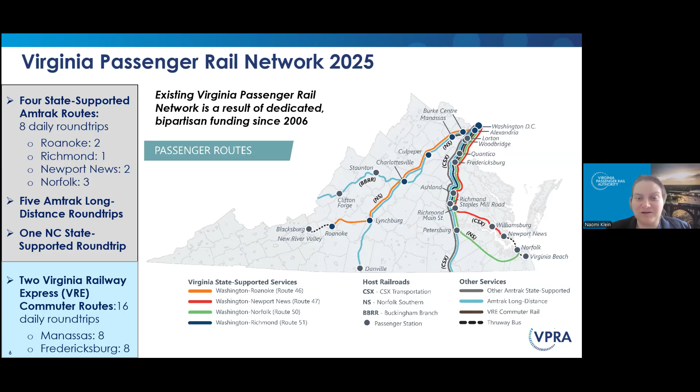So the benefit of the Transforming Rail in Virginia program - that landmark deal I was referring to with CSX is known as Transforming Rail in Virginia - allowed us to get the land and create this program of projects that will increase the tracks between DC and Richmond so that we can provide more and better service.

So increased capacity to accommodate more passenger rail service. That even includes VRE being able to run trains at night and on the weekends. Improve efficiency of passenger, commuter, and freight rail services, reducing bottlenecks and improving reliability - not just running more trains, but having existing trains be able to be on time more often.

This shows you our portfolio of projects between Washington D.C. and Richmond, Virginia. Today we're here talking about the Long Bridge project and the Alexandria 4th Track project. Those are the 2 projects that will impact residents in Alexandria and Arlington. But you can see we have a slate of projects being built, and when these projects are completed, that's what will unlock new rail service.

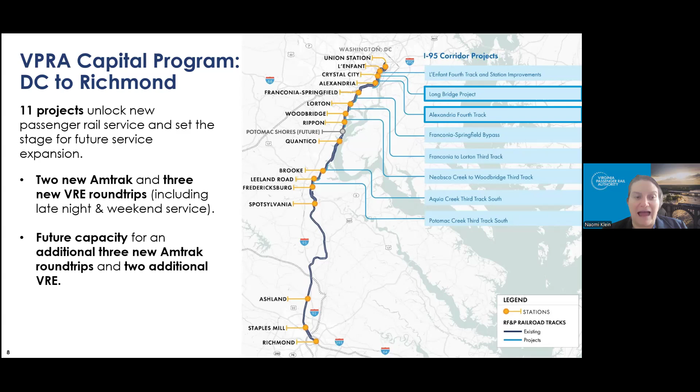As you can see in the text, we have 11 projects that unlock new passenger rail service and future capacity, as well as new service that's already planned. So I'm here today to talk about the Long Bridge project, then I'm going to hand it off to some of my colleagues to talk about other projects in the community.

So the Long Bridge project - you can see the project limits on this map, and we're going to get into some more detail on that. This is an existing 2-track bridge that crosses the Potomac River. It is not only a bottleneck for DC and Virginia, but for all of the East Coast. Even your orange juice coming from Florida typically has to go over this 2-track rail bridge.

Why it is such a bottleneck is because south of here you have 3 tracks, north of the bridge starting at Union Station going up the East Coast you have 4 tracks, but right at this point at the river you have only 2 tracks, and that has to serve CSX freight rail, VRE commuter rail, and Amtrak intercity passenger rail. So all 3 of those rail modes are sharing this 2-track bridge. When this project was first proposed years ago, the tracks were already operating at 98% capacity.

So the purpose of the project is that we will be constructing a new separate 2-track bridge, leaving the existing bridge in place to continue to be owned by CSX. So then you will have 4 tracks - 2 owned by VPRA, 2 continuing to be owned by CSX - which will double the rail capacity and allow us to run passenger trains separate from freight trains and remove this bottleneck. There's also a bunch of other bridges and infrastructure associated with what I just described, which we'll get into in a little more detail.

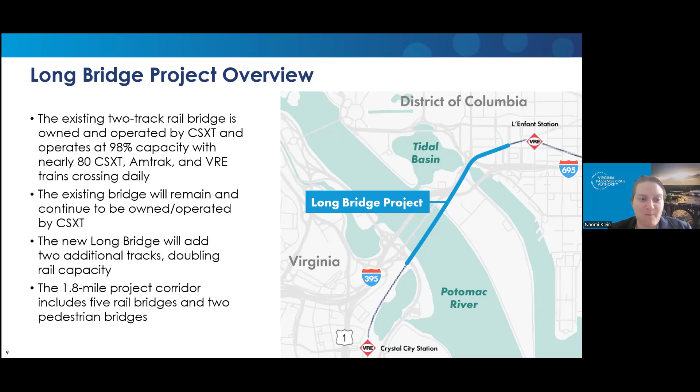Yes, so I talked a little bit about the 2-track bridge across the Potomac River, but this entire project is really 5 rail bridges and 2 pedestrian bridges. So while we call it the Long Bridge, it is much more than just a singular bridge. This shows you the project limits in a little more detail.

It begins in Arlington at what we call RO interlocking. Interlocking is just a railroad term for where various tracks all change over so that trains can move between them - it allows trains to move from one track over to other tracks and switch. So that's the term interlocking. It begins just south of the Long Bridge Aquatic Center. The project then builds the 2 tracks over and across the George Washington Memorial Parkway and Mount Vernon Trail, then over the Potomac River, and then in East Potomac Park, over Ohio Drive, then over I-395.

Once it crosses over the I-395 bridge, the amount of space we have to work in narrows so much that we cannot build a separate 2-track structure. So what we have to do on the other side of I-395 is actually take down the existing 2-track structure and rebuild a 4-track structure.

And that new 4-track structure will continue through East Potomac Park, over the Washington Channel, over Maine Avenue in Southwest Washington, D.C., through the Maryland Avenue overbuild, and then end where you're looking on the screen on the right side at LE interlocking, which is just south of L'Enfant Station.

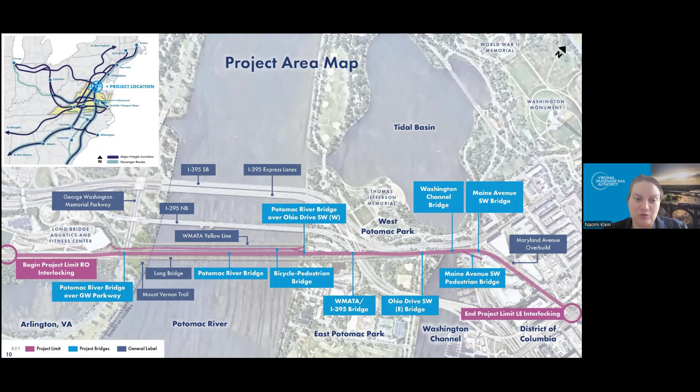I will add that while the 2 rail bridges are separate, all 4 tracks are interoperable. So should there be an issue on the freight tracks or an issue on the passenger tracks, trains would be able to use either structure if that was necessary. Obviously, that's not the preference.

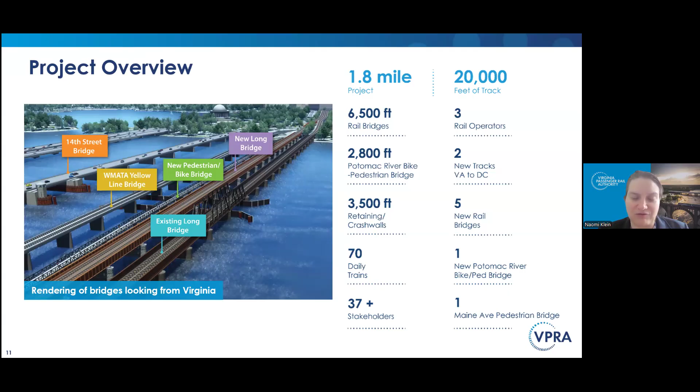Next slide, please. So because of the size and scope of this project, it has been separated into 2 packages, a north package and a south package. Today we're really going to be focused on the south package because that's what's going to affect Alexandria and Arlington residents the most. The south package starts at RO interlocking, just south of the Long Bridge Aquatic Center, and builds all of the rail infrastructure that goes across the Potomac River and lands in East Potomac Park, closest to the water.

Additionally, the south package is going to construct the bike pedestrian bridge. That south package is a design build contract, and our design builder started with us at the beginning of this year, so about 6 months ago. Construction is estimated to begin in the middle of next year. Currently, we're in a scope validation phase.

The North package picks up in East Potomac Park in DC, just on the other side of the river, and constructs everything in East Potomac Park and then into DC to LE Interlocking just south of L'Enfant. And that is a progressive design build contract. That contractor started with us about a year and a half ago, so early 2024.

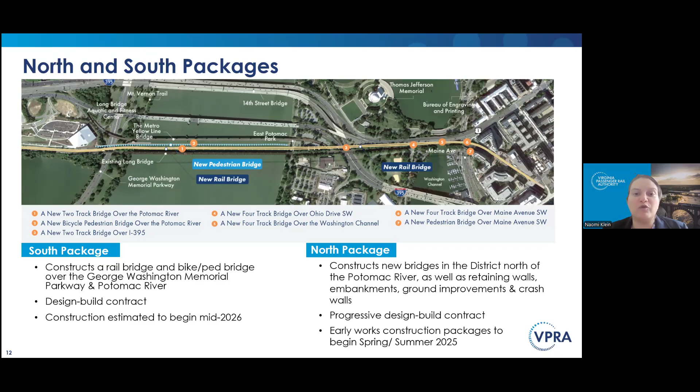We are currently starting on early works packages, so nothing that is full construction of these structures, but prep work that will, things like utility relocation or tree removal, that will allow us to get ready to start building those structures. So those early works construction packages are happening now, spring, summer 2025, with full construction starting in about a year.

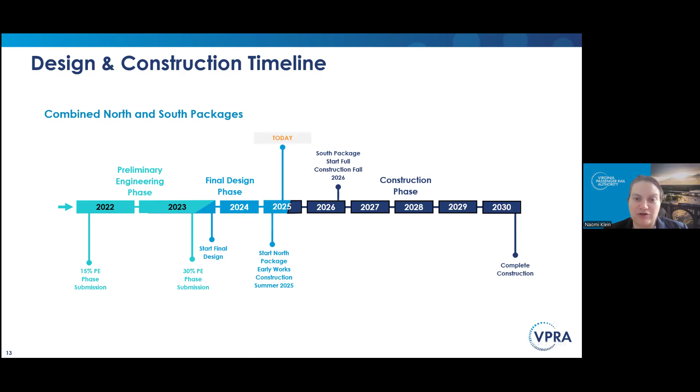Something I may have missed saying a couple slides ago is that the bike pedestrian bridge connects the Long Bridge trail that brings you to Long Bridge Park at the Long Bridge Aquatic Center, with the bike lanes in East Potomac Park, and then also on the Virginia side with the Mount Vernon Trail. So there are 2 connections to the bike ped bridge on the Virginia side, 1 connection to the DC side in East Potomac Park.

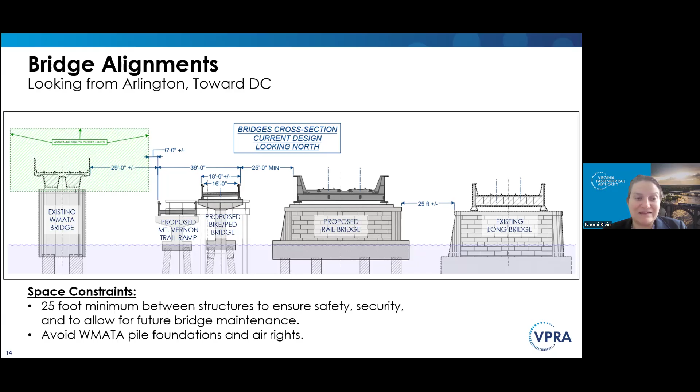So that bike pedestrian bridge includes an ADA accessible ramp down to the Mount Vernon Trail, and then our new proposed 2-track rail bridge, and then the existing Long Bridge. Everything that we're fitting is pretty constrained by space. Also, leaving space for us to be able to do maintenance on these structures is critical.

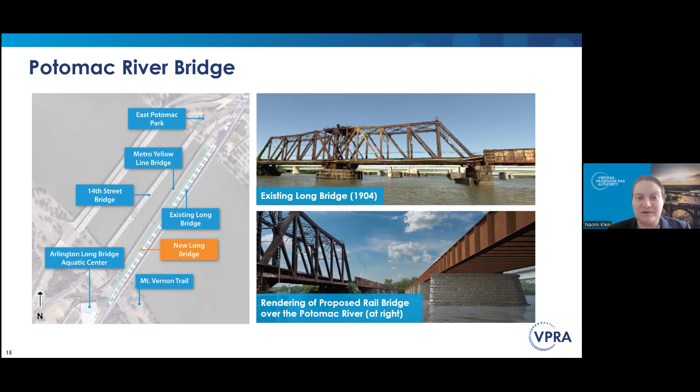We just got a message that they're not seeing our slides. I'm not sure what's happening, I can see them. Yes, I'm seeing the slides. Okay, great. Whoever messaged that, I think it might be your computer situation. You may want to log out and log back in, or tap on the button that says Chris Stokes' screen in the upper left corner of your screen. Okay, thank you.

That bridge is going to be 16 feet wide. The current path across the Potomac River is about 7.5 feet wide, so more than double what the existing connection is. The existing connection will remain in place, but the existing bike ped path is part of the 14th Street Bridge. So while it does have a fence, you're riding on a structure that's also shared with cars. This new bridge is going to be dedicated for bikes and pedestrians, so I think it will be a much nicer user experience.

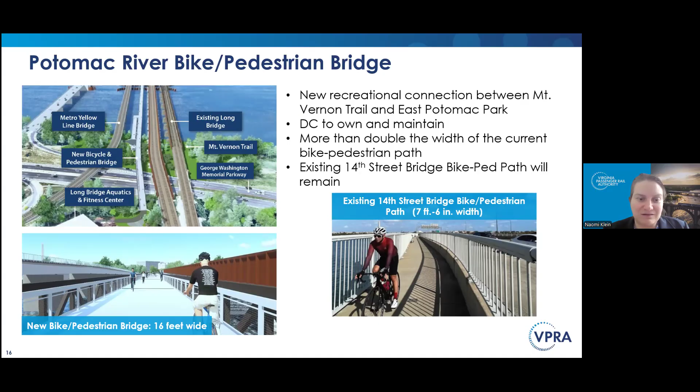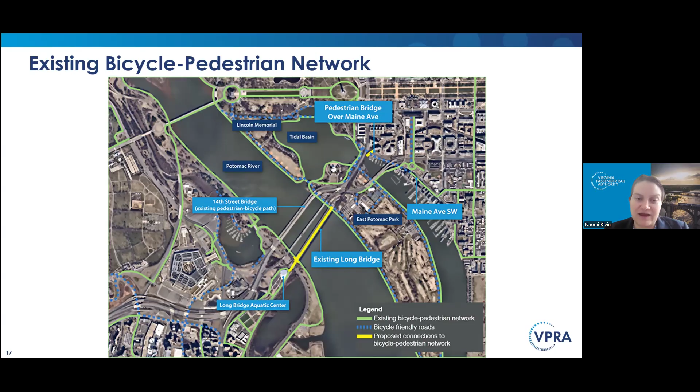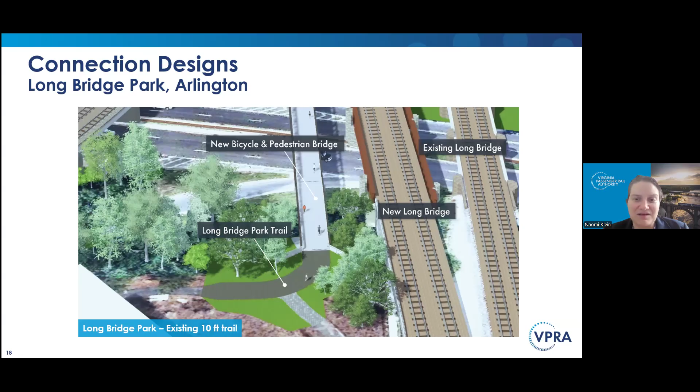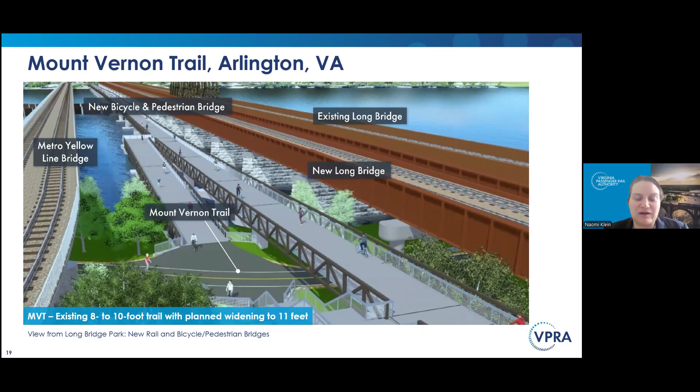This shows you the landing at the Mount Vernon Trail. On one side, as I've said a couple times, there's an ADA ramp that comes down. On the other side, there is a staircase for pedestrians or users who want a quicker connection than the ramp, and I believe those stairs also have a bike runnel attached.

So what is happening now? I referred to some early works packages, and I also talked about the fact that Long Bridge South is doing their scope validation, essentially collecting data that will help inform the final design of their project. So we're doing borings, test piles, tree and brush clearing, and working on maintenance of traffic plans, getting permits and working with our partner stakeholder agencies to make sure traffic impacts are thoughtful, comprehensive, and safe.

No, I don't think we are talking about that today, but we will be. The borings and test piles are work we're doing to essentially understand what is happening in the ground, so that when we build the bridge, we're building a structure that we know can be supported by what is underneath.

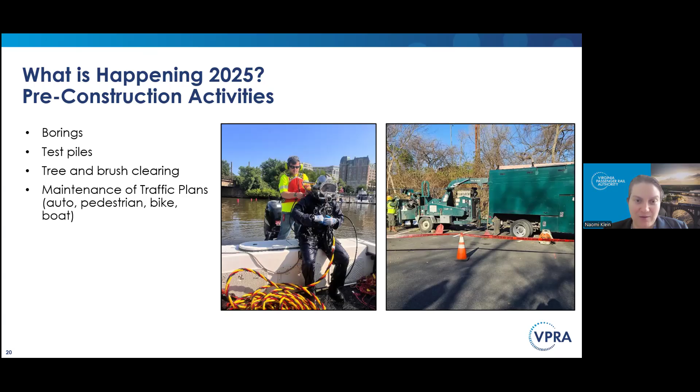I believe I'm handing this off to, am I handing this off to Catherine? Or am I talking about... No, this one's yours. Oh, great, your last slide. Thanks, okay.

So, boating community travel impacts. In the Potomac River this summer, we'll be doing test piles and geotechnical borings, which I just talked about briefly. The navigation channel is going to remain open throughout construction.

Where you can navigate under the bridge may shift for short periods of time, but there will be announcements, and we're in coordination with the U.S. Coast Guard on that work. There will be minor encroachments on the navigation channels, and buoys will guide boaters on where to go. No work is planned in spring and summer, and the Washington Marina and parking lot will remain operational during construction. That's actually on the DC side in the north package, so I don't know that it's necessarily relevant to residents of Alexandria and Arlington.

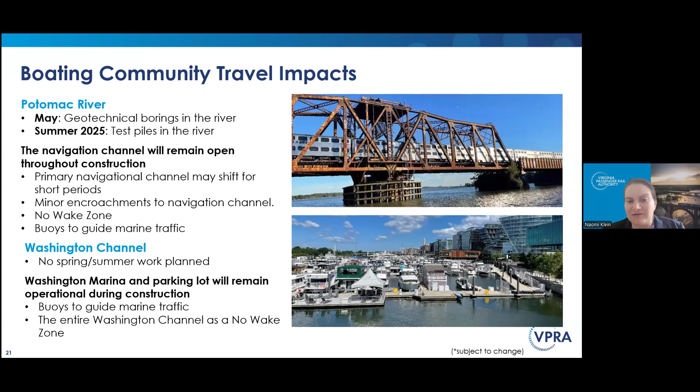One quick note to revisit from the maintenance of traffic discussion: most of the traffic impacts for the Long Bridge project are really going to be on the DC side for the north package. For the south package, the anticipation is that most of the bridge work is actually going to be built from the water, by floating the job. So while there will be traffic impacts to the George Washington Memorial Parkway, as much of the job as we can is going to be built from the water.

So with that, I believe I am turning it over to Adeel to talk about the Alexandria 4-track project.

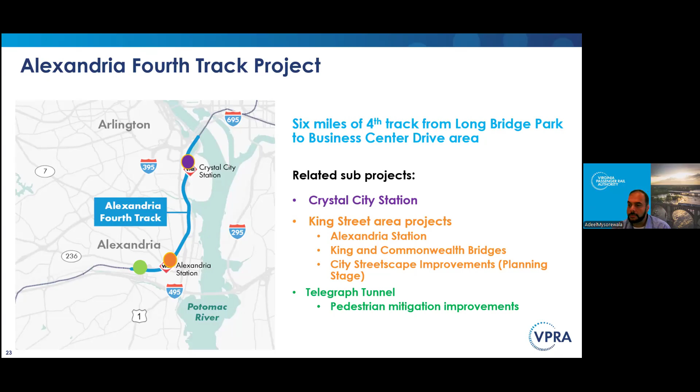And then we also have some improvements in the Telegraph Tunnel area. There's a pedestrian mitigation improvement that Mark Schnaufer is going to talk to you about a little bit after my presentation. So if you can go to the next slide, please.

So the project — basically what we're doing is we have 4 tracks now that Long Bridge is going to build, so we need to continue those down south till where VRE splits into the Manassas line and the CSX Fredericksburg corridor. So 4 tracks basically conclude at that point where VRE splits into those 2 areas. It's approximately 6 miles of new track, like I mentioned before.

As 4-track, it stays within the existing right-of-way, so we're not impacting a lot of adjacent property owners. There's some minor acquisitions that we're working on right now. The goal is to increase rail capacity and address the bottleneck that we have right now, so we're addressing it at Long Bridge and addressing it in Alexandria.

With construction expected to begin late this year, early next year, you'll probably see more crews out there next year than this year.

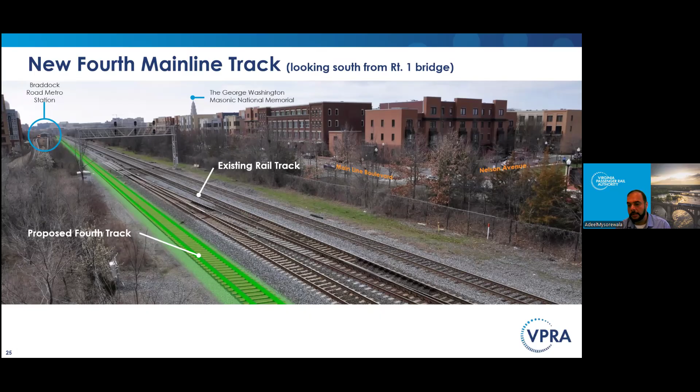I just want to step in for one second before Jason starts and just emphasize the fact that VPRA and Virginia Railway Express are working together very closely on all these projects. So we'll be partners for each of these community advisory group meetings to present material and updates on all of these related projects. So Jason, I'll let you jump in now.

Yeah, appreciate that, Meredith. Good afternoon. I am Jason Bortz, project manager for a couple of projects that overlap within the footprint of these larger VPRA projects. I'm going to start here with the Crystal City Station project.

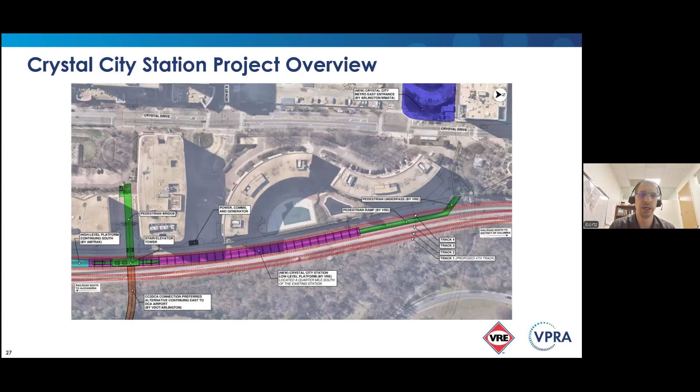Overall, we're driving two main things here, which is about efficiency of our operations. The new platform will be longer than our existing platform. We have 8-car train sets, but the existing platform isn't long enough to open the doors on all the cars, so people have to walk to a different rail car just to get off the train. We'll be addressing that problem. We'll also be going from having 1 boarding edge to 2 boarding edges, which will allow us to be more efficient and consistent with our timelines, keeping everybody moving on time.

With the relocation, we'll also be closer to the Mount Vernon Trail connector, closer to the new metro entrance, and with the connectivity to the airport, there's going to be a significant enhancement to intermodal transit connectivity. Next slide, please.

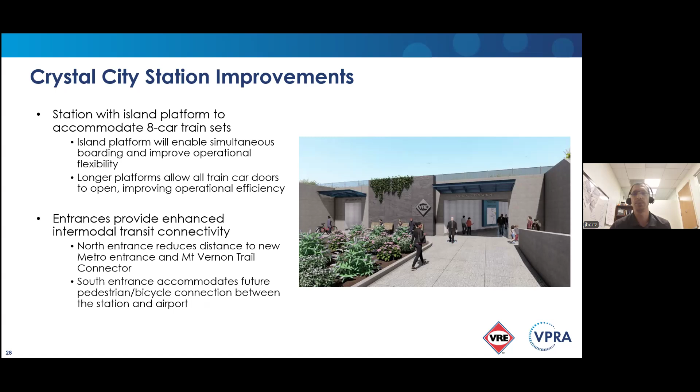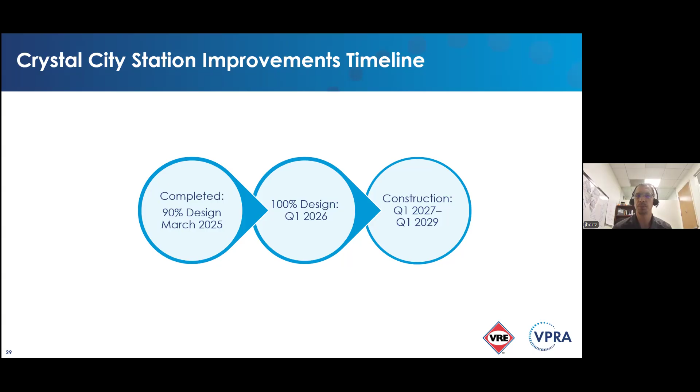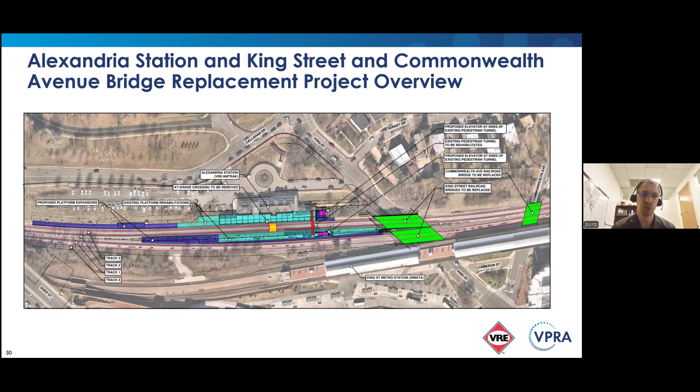On the left-hand side, in blue and purple predominantly, are the improvements to the existing station. Those are the approximate footprints of the platforms that we will be rehabilitating. Noteworthy that the station project does not make modifications to the existing historic station. Changes are predominantly to the platforms and off the side of the platforms, and I'll show a bit more on that in the next slide. Next slide, please.

We have three main things we are looking to make improvements at. First and foremost is removing the existing at-grade crossing between the platforms. It's a safety issue, and we're actually using federal highway crossing safety funds related to that, specifically for the removal of it. As we do that, we'll also be replacing both platforms. If you have been out to the station, you see yellow step boxes strewn about the platforms, and those are to help people get on and off the trains, driven by the fact that the platforms are not vertically as high as they should be next to the track. We'll be fixing that as we go.

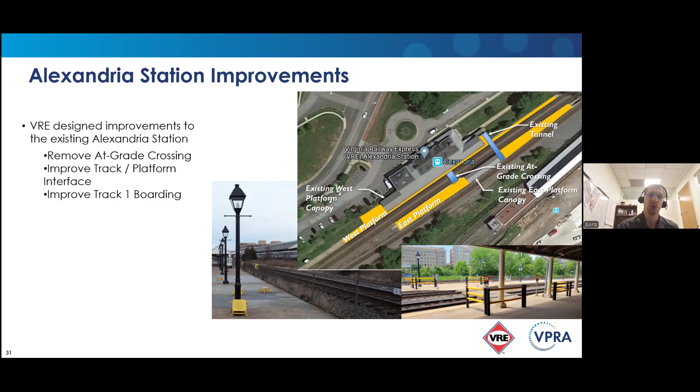The King and Commonwealth Bridge Replacement project - the VPRA, under the 4th track project, initially did an evaluation of these structures and found them to be in need of repair. Ultimately, as they evaluated the appropriate types of repair, it was determined that the most effective means was to repair by replacement. This will reduce the need for maintenance and service disruptions, and will enhance safety for pedestrians and motorists traveling underneath the bridge, as well as the crews operating on the bridge.

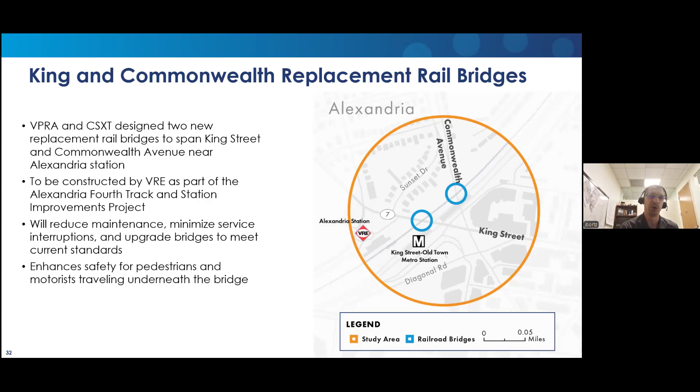At Commonwealth, one of the abutments, the northern abutment, stays in place - there's a large utility right behind it, so we can't move that. But the southern abutment will ultimately be moved back, similar to what's happening at King Street. We're in close coordination with the city as they look to take advantage of the additional space beneath the bridge, to make sure we deliver that area in a way compatible with their vision for the approaches on either side of the bridge along both King Street and Commonwealth Avenue.

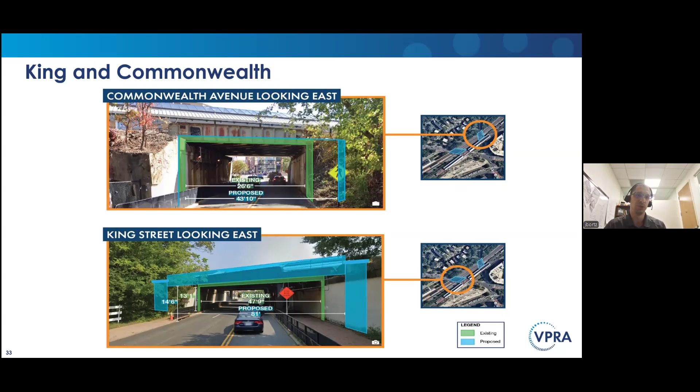We've been going through a lot of coordination over the last few months to take what were previously two separate projects and merge them into a single design set. Those plan sheets are due imminently, and we have recently completed permitting with the city and are working through property acquisition right now. We're looking to advertise this one for construction in the next couple of weeks, hopefully with construction starting by the end of the calendar year, kicking off in the beginning of 2026, with approximately a 2-year construction duration.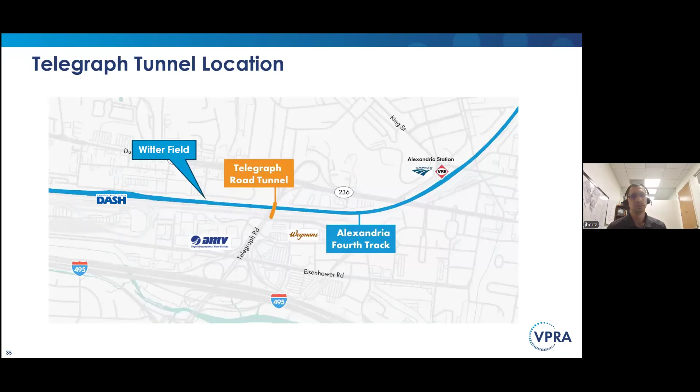That's to you, Mark. Yep, thank you, Jason.

So we went from these huge, multi-billion-dollar projects to the smallest piece of our presentation today, which is the removal of the existing Telegraph Road bike and pedestrian tunnel. It's called a bike tunnel, but many of you might not even know it exists. It's a small tunnel that goes underneath the existing WMATA and CSX rail infrastructure. It ties into the development south of the tracks - Wegmans is the highlighted feature there - and ties into Witter Park on the north side.

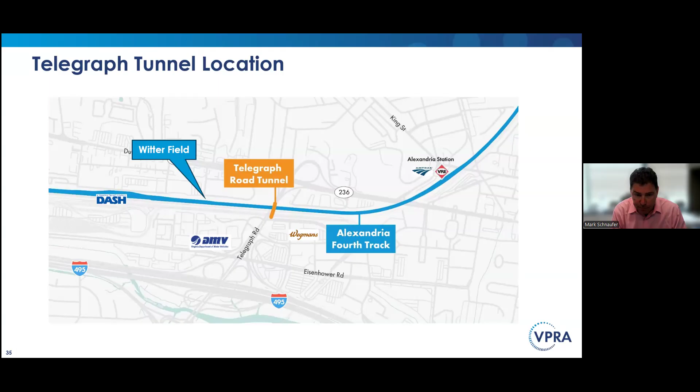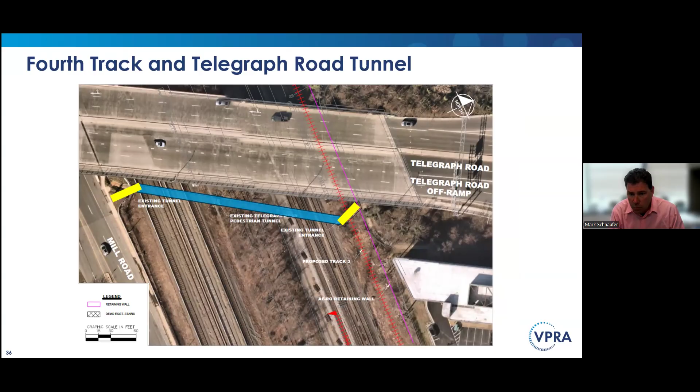Just a very back-of-the-napkin cost analysis showed it was cost prohibitive to repair, for what is, generously speaking, a very lightly used access point.

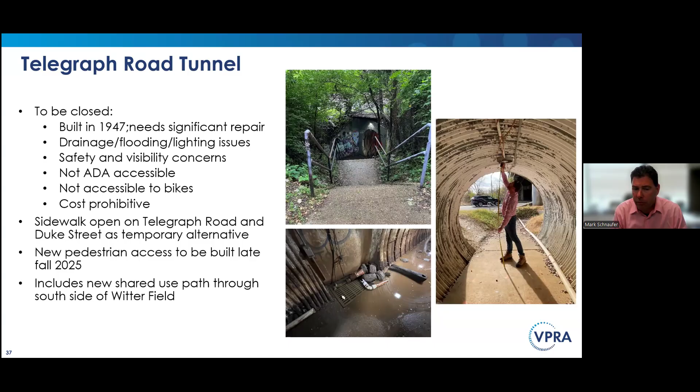This will really cut that trip down from approximately 20 minutes using Telegraph and Duke Street. You'll be able to utilize the existing sidewalk underneath the bridge, taking about a 10-minute walk to get to Witter Field, with the simple construction of this about 400-foot path at the south side of the softball diamond.

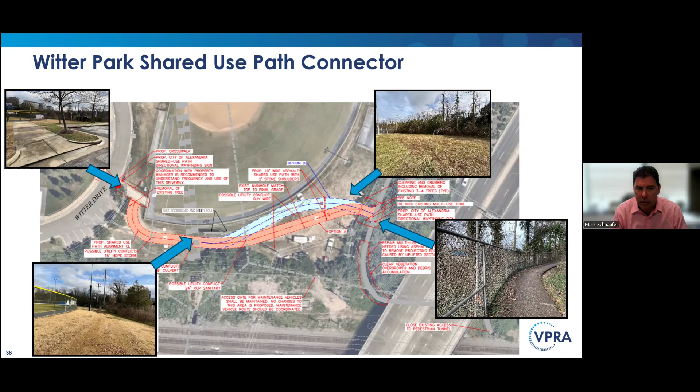Next slide, please. I believe that's actually it for this. We'll be answering any questions on the whole 4-track area projects at the end of the presentation.

Thank you. Many thanks to our speakers. I want to make sure we have time for Q&A, so I'll just briefly go through this portion, but we want to highlight the fact that we have been doing quite a lot of community and stakeholder outreach, and we plan to continue.

Some of the methods we use: we will be establishing a project hotline for our Northern Virginia and DC projects. We have a digital newsletter that we send out periodically, so we encourage you to sign up for that on our website. Our website is filled with project fact sheets and transportation advisories. We will also be posting physical signage on site to help guide people and provide information about what's happening.

And we will continue to hold community events and set up tables at events throughout your neighborhoods. We want to hear from you. One of the key roles we see for the community advisory group is to help guide us in identifying places where we should go to talk to people who will be impacted by these projects and benefit from them long term.

Next slide. We will soon have on our website a construction disruptions map that will allow you to enter a specific location, such as where you live, work, or travel, so that you can stay up to date over time with any disruptions occurring as a result of our work in DC, Arlington, and Alexandria. This will actually be live for all of our projects across the state of Virginia.